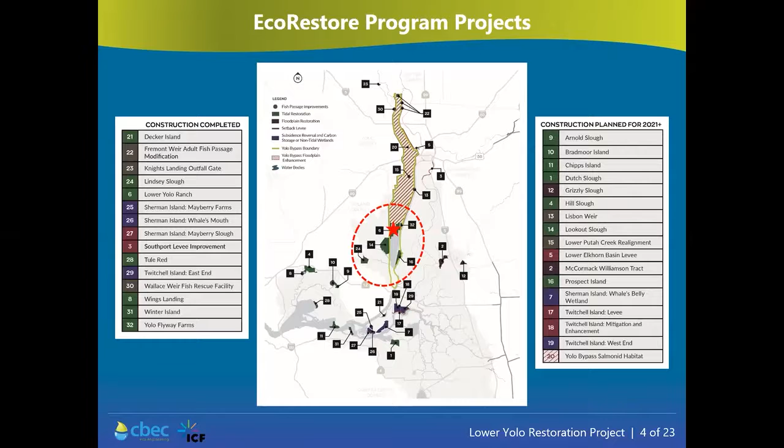So why is developing habitat resources within the Cache Slough complex so important? The complex represents the critical intersection between the historical Sacramento River floodplain, which has been redefined by the Yolo bypass, and the North Delta. The complex provides important aquatic habitat and food resources for Delta smelt, as well as salmonids and numerous native fishes. At Lower Yolo, due to its location at the fluvial tidal interface, most of the site exists at natural intertidal and supratidal elevations and would inundate under a range of tidal and flood flow conditions. And the portion of Yolo Ranch targeted for restoration largely consists of unimproved grazing lands with relatively low productivity compared to the rest of the ranch.

The importance of this site is further exemplified by the historical ecology investigation for the Delta prepared by the San Francisco Estuary Institute. The project site, shown by the red star, historically held a uniquely rich location at the intersection of the Putah Creek alluvial fan, the historic Yolo Basin floodway, and the North Delta tidal marshes. Before being diked and reclaimed for agricultural use in the early and mid 1900s, the site supported a combination of grasslands, seasonal wetlands, backwater lakes, and tidal marsh. The restoration project is effectively restoring these areas that were historically wetlands prior to the 20th century.

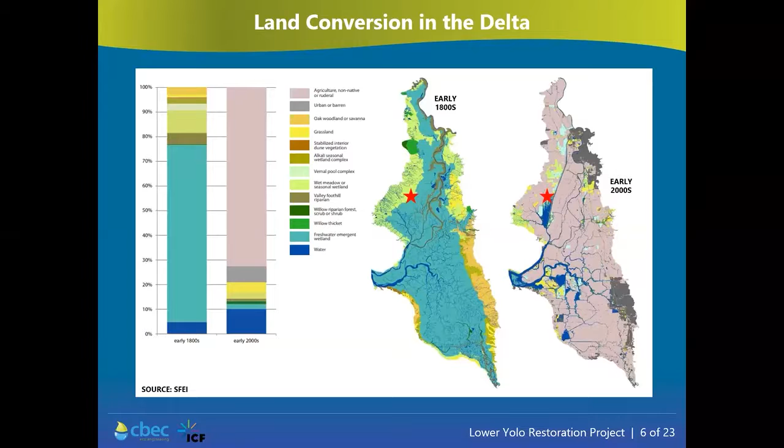As mentioned previously, the site has primarily been used for irrigated pasture to support large-scale cattle grazing operations over the last several decades. Westlands Water District purchased the property in 2007 with the intent to develop a habitat restoration project. In total, and as shown by the black outline, the ranch is 3,427 acres, of which 2,149 acres were restored, as shown by the green dashed outline. The remaining 1,278 acres will remain in irrigated pasture and serve to self-mitigate for impacts to agricultural production, as well as provide for a conservation easement for Swainson's hawk foraging.

Neighboring land uses include the naturally reclaimed lands to the south of Liberty Island and Little Holland Tract, the constructed Tidal Marsh at Yolo Flyway Farms to the northeast, which is the sister project to Lower Yolo and was constructed in 2018, and wetlands to the north that are managed for waterfowl on Mound Farms.

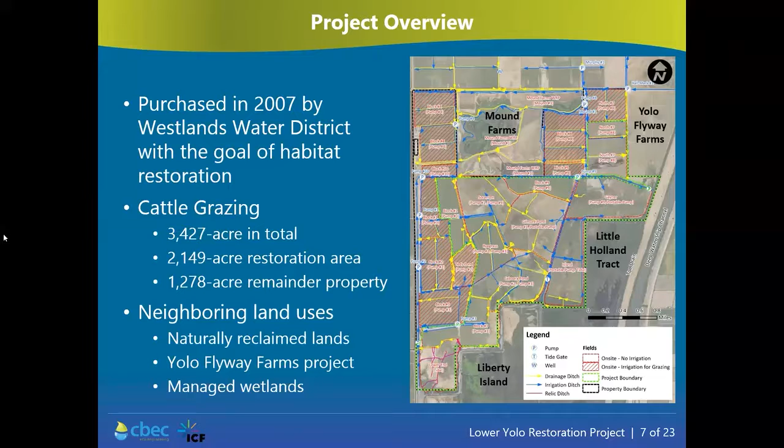More specifically, the goals of the project are to partially satisfy the federally imposed 8,000-acre tidal restoration obligations for continued operations of the two water projects, as well as serve as near-term action for EcoRestore, with the objectives to, 1, support the recovery of Delta smelt by enhancing regional food web productivity, 2, provide rearing habitats for out-migrating salmonids, and 3, more generally, to provide ecosystem services to support a broad range of other aquatic and wetland dependent species.

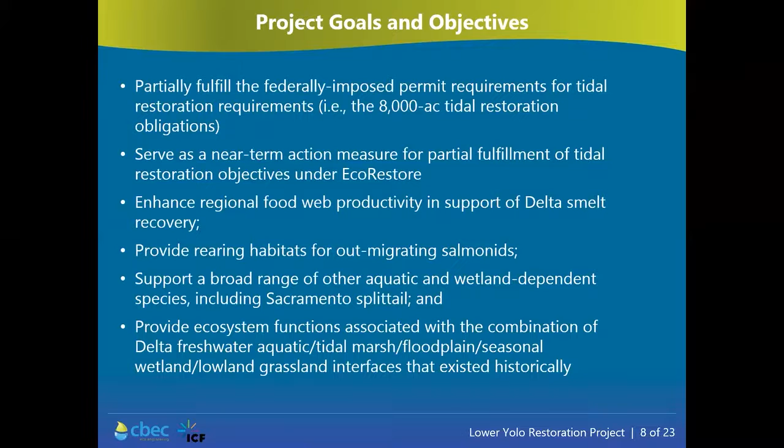Sorry about that. For a quick snapshot of the project development timeline, the subject property was purchased in 2007, and almost immediately baseline studies and preliminary concepts and evaluations were prepared over the ensuing years. Preliminary concepts initially called for moving more than 3 million cubic yards of earth to provide for immediate habitat benefits.

Then in 2013, and similar to other restoration projects in the region, an expert panel was convened that included a field tour followed by a workshop. Members of the panel included folks from the Delta Science Program, DWR, USGS, the Bureau, and UC Davis, among other folks, including some restoration practitioners. The charge of the expert panel is to provide design recommendations, define hypotheses and experiments to be tested to contribute to adaptive management and to identify metrics and monitoring protocols.

A key design recommendation from the expert panel was to take a more passive restoration approach, thereby working with existing land elevations and reserving lands for sea level rise accommodation, given the project's location at the fluvial tidal interface. This ultimately resulted in a refined concept moving less than 300,000 cubic yards, or a tenth of what was originally proposed.

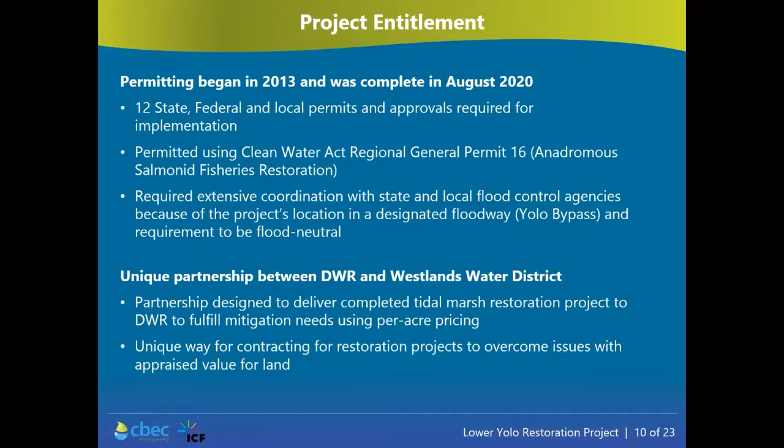Final designs were completed in 2019, and the project was ultimately constructed under a compressed schedule in summer 2020. The construction schedule, which was intended to start in May but was delayed until August, was compressed due to the presence of multiple Swainson's hawk nests affecting the project area, as well as black rail presence near the proposed spoils area. However, the contractor was very adaptable to the circumstances, and design modifications and field fits were made in real time to accommodate the impacted schedule, as well as enhance tidal floodplain connectivity.

Recordation of the various conservation easements for habitat, Swainson's hawk, and agriculture is still ongoing a year later as part of final delivery of the project to the department.

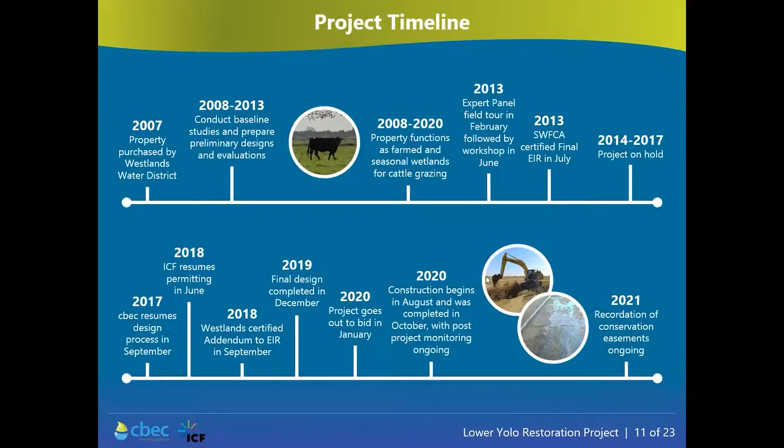The project resulted in enhancement and restoration of more than 1,700 acres of tidal marsh, and enhancement of more than 400 acres of seasonal floodplain and transitional uplands, as well as riparian habitats. This is largely achieved by removing the grazing pressure, moving the least amount of earth, and opening the site back up to tidal action.

The supratidal zone represents the transition from tidal marsh to uplands, and given that the project site is within the Yolo bypass floodway, these areas are expected to become regularly inundated during spring tide conditions, seasonal floodplain activation via Fremont Weir overtopping in the planned future Big Notch project, as well as from backwater effects due to future sea level rise. Sea level rise is expected to be about a foot by 2050 based on guidance, and it is expected that the supratidal habitats will convert to intertidal habitats by 2050.

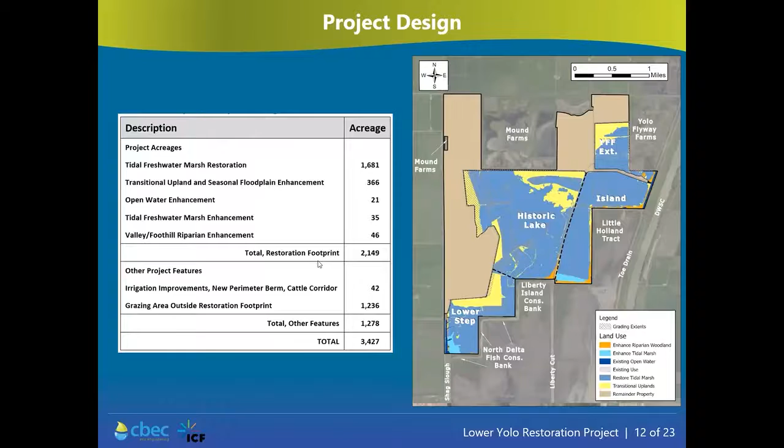The perimeter berm also serves to provide access to the restoration property along its entire perimeter, as well as a corridor to move cattle between the western and eastern portions of the remainder property.

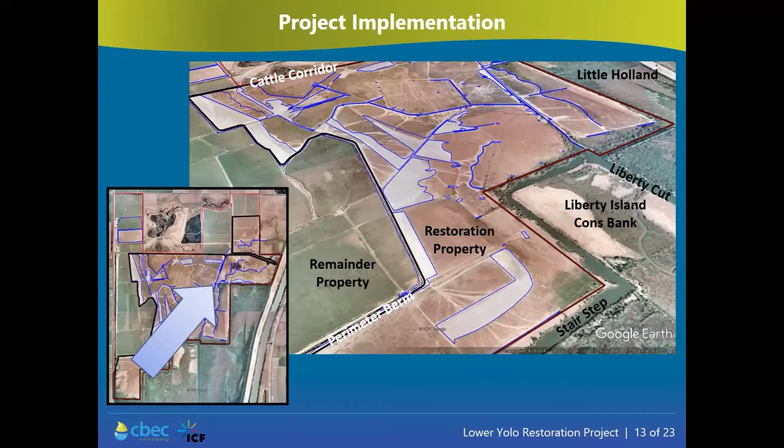As shown here, and looking from the center of the restoration site to the northeast, the project grading included providing a direct connection and expansion to the Yolo Flyway Farms tidal restoration project, which, as said before, was constructed in summer 2018. This area of the restoration property is hydrologically isolated from the balance of the restoration property during tidal conditions, but it is connected during flood events.

Due to the need to maintain a point of diversion on the Toe Drain, an irrigation canal was retained that services the remainder property as it also services offsite managed wetlands at Mound Farms.

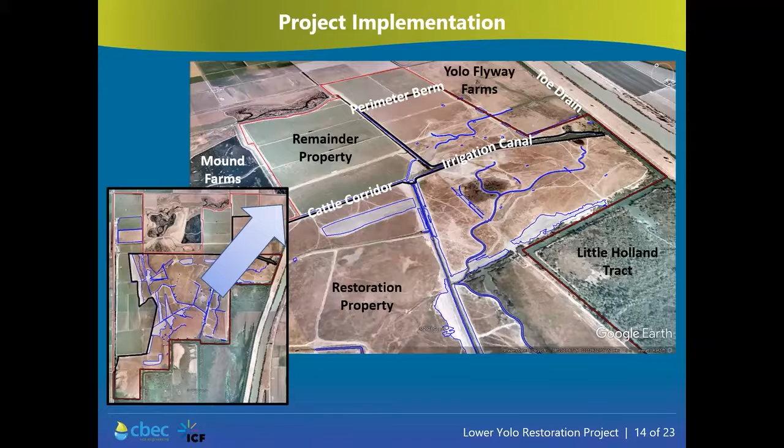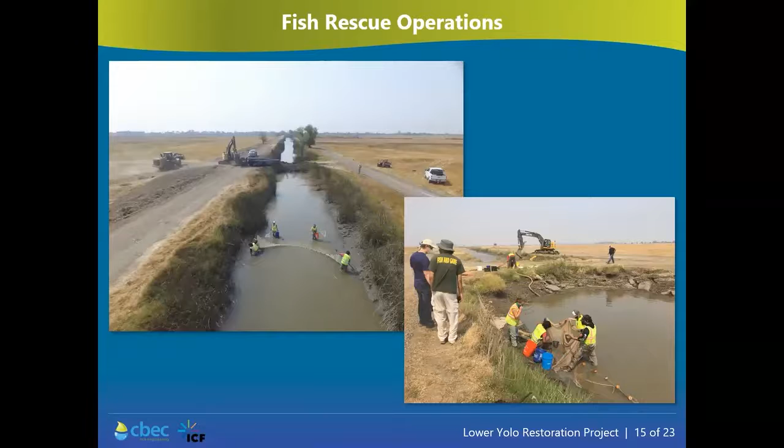The following construction photos show the various construction activities that included fish rescue operations from existing irrigation canals that were intended to be deepened or reclaimed as tidal channels, extensive harvesting of tules from vast disturbance areas, which were temporarily stockpiled and irrigated on site prior to transplanting them into the lower lying intertidal areas.

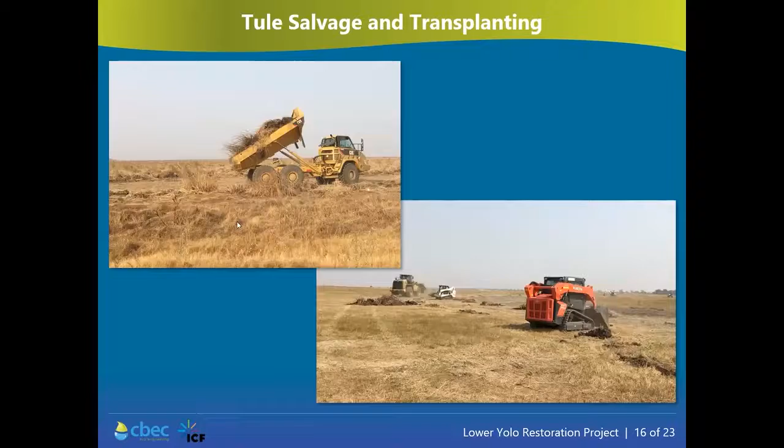Here we have the excavation of new tidal channels as well as the deepening of existing canals, taking advantage of the existing irrigation network that was out there so as to minimize the amount of dirt that we were moving.

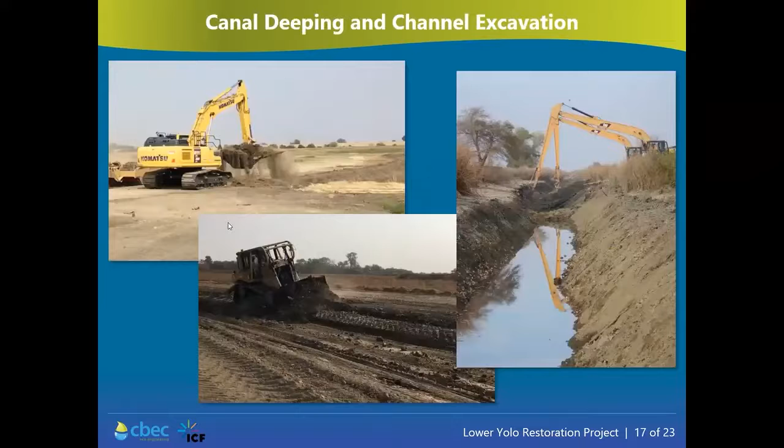The excavation of interior breaches to connect the various areas within the restoration property, including the connection to Yolo Flyway Farms as shown in the lower right.

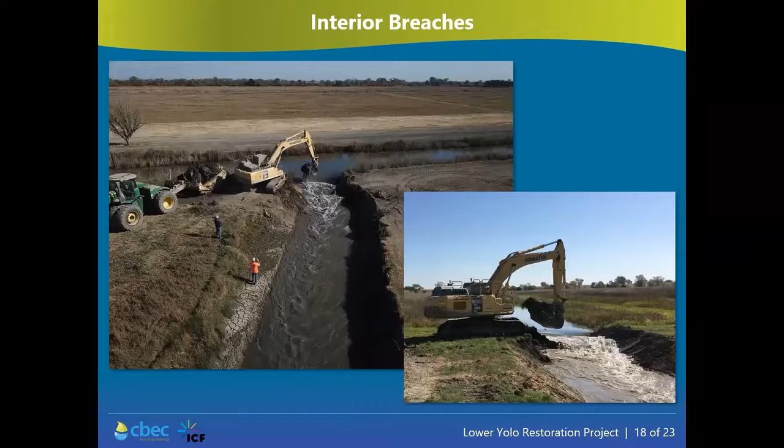And finally, the excavation of exterior breaches to connect the restoration area to the Toe Drain to enhance flood flow activation, along with removal of tide gate infrastructure to provide the primary tidal connection to the delta.

The upper left photo shows a culvert along the Toe Drain being removed, but as part of a field fit, this excavation area was left open to enhance floodplain connectivity, so smaller flood flows coming down the Yolo Bypass could more readily activate the restoration area, as well as future planned Big Notch project flows that would entrain more flow and juvenile salmon into the bypass. These fish would have an opportunity to more readily access the property from the Toe Drain.

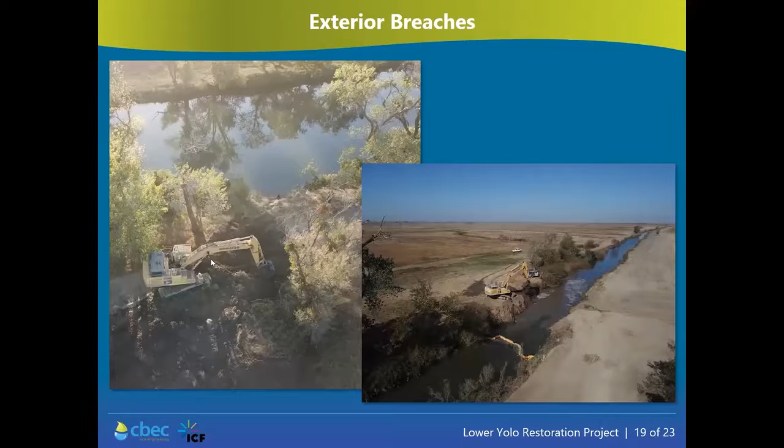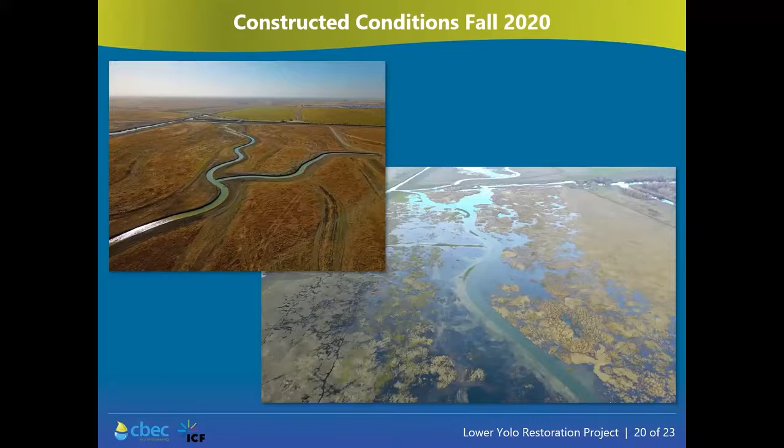Following construction, long-term performance monitoring at some point here will be conducted by the Department of Fish and Wildlife with a focus on food web production and water quality, and conducted in a manner that will help to standardize the monitoring methods across the various restoration projects in the region. However, and as previously stated, project closeout with the department is still ongoing.

In addition to recording the various conservation easements, the department is looking to leverage credit towards their newly acquired incidental take permit for operations of the State Water Project, which was not within the original purview of the restoration project. As part of that process, additional technical analyses needed to be performed post-construction.

And just to close it out here, thinking about some lessons learned, I offer the following. First, given the long project hiatus, we should have re-engaged the agencies on key design assumptions, especially if the project is intended to be used to fulfill a new obligation.

Two, consult with CalGEM very early in the design process to address costly gas well re-abandonment concerns sooner rather than later. Thankfully, we were able to negotiate with CalGEM and avoid what could have been very costly re-abandonment.

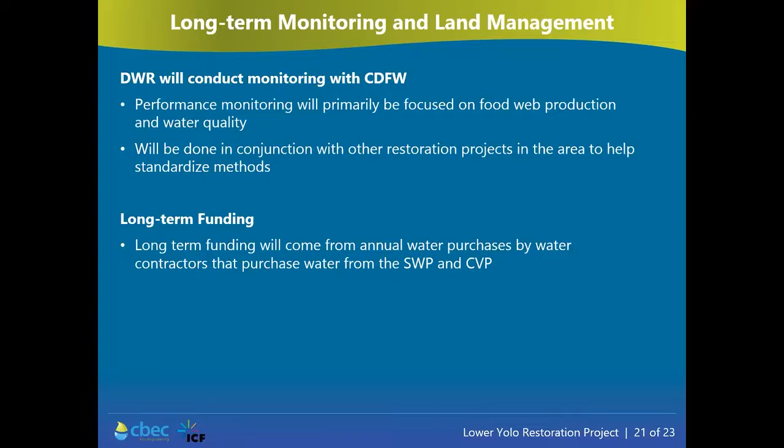So our first question here is from Annabelle Law. She asks, does cattle grazing and agriculture on adjacent lands directly or indirectly affect the restoration of wetlands? It does not. The lands that are remaining in grazing are hydrologically, at least superficially, isolated from the restored footprint during normal tidal conditions. It's not until you have system-wide flooding in the bypass that everything is basically hydraulically connected.

But during normal tidal conditions, there's no runoff from the agricultural area that feeds into the restoration footprint. Most of the agricultural area is sort of self-recycling. In addition to tidally charging their canals, they also drain back into those canals and relift that water. So yeah, there's no direct impact from the agricultural grazing that influences the productivity of the site. Great, thank you.

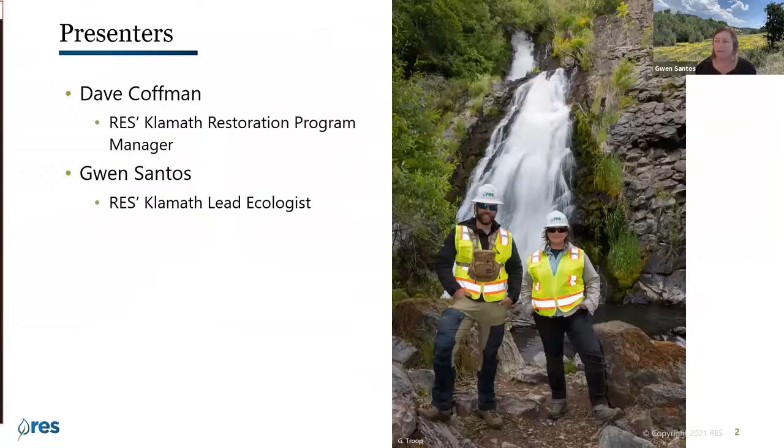Dave and I are going to talk about restoration elements of the Lower Klamath project today. There we go. As Keely mentioned, Dave Coffman is the Klamath Restoration Program Manager for RES, and